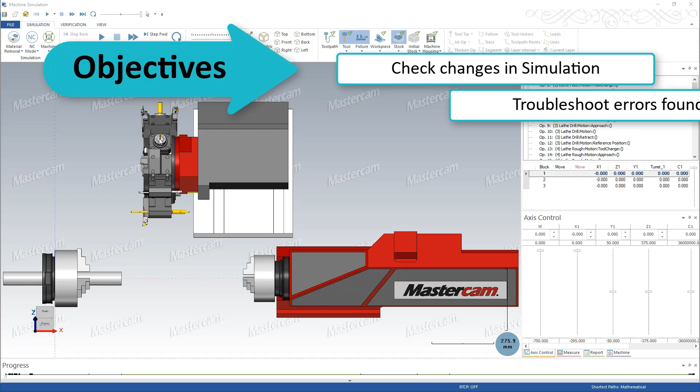In this video, we'll check the previous changes we made in simulation, and we'll troubleshoot any errors that we find. I've launched into simulation and I'm ready to simulate our latest changes. I'll be speeding up the video when appropriate to move through areas in simulation that have no collisions.

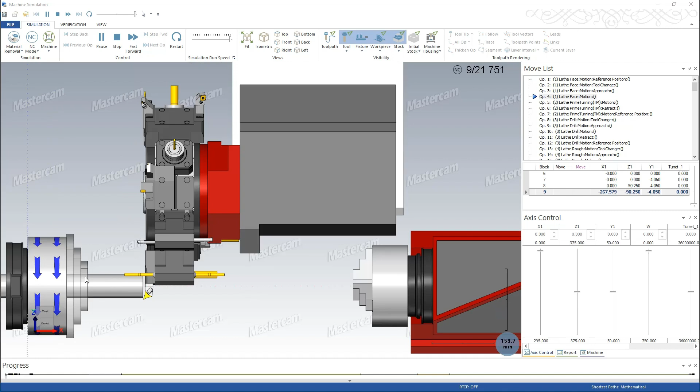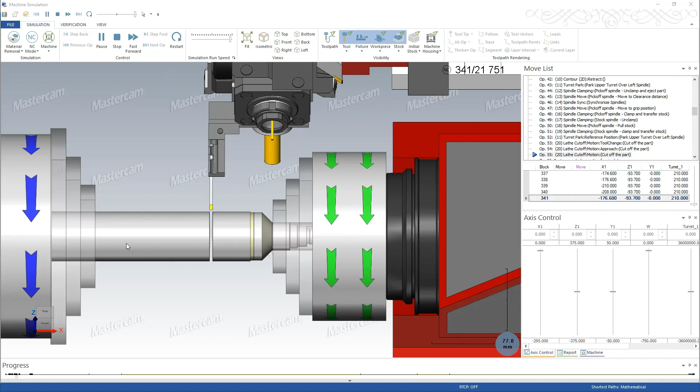I'll start the run button and zoom in on the left spindle. Our left spindle ops and our pick-off cutoff look good.

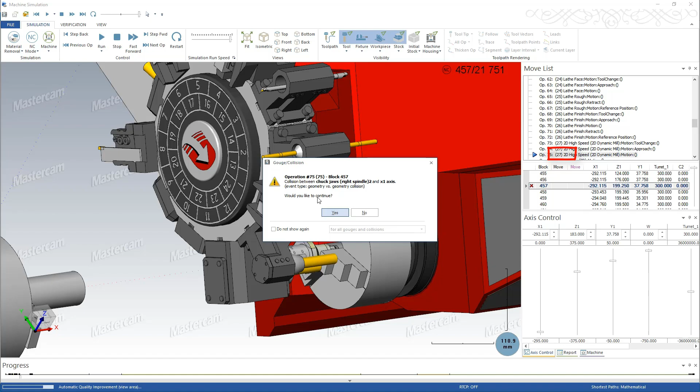We have our first collision on the right spindle. We can see that it's operation number 75 on the move list, which would be operation 27 in the toolpath manager. I'm going to say no, I don't want to continue. I want to take a look at this. This is our face mill, which is doing the scallops, and we're hitting the chuck jaws.

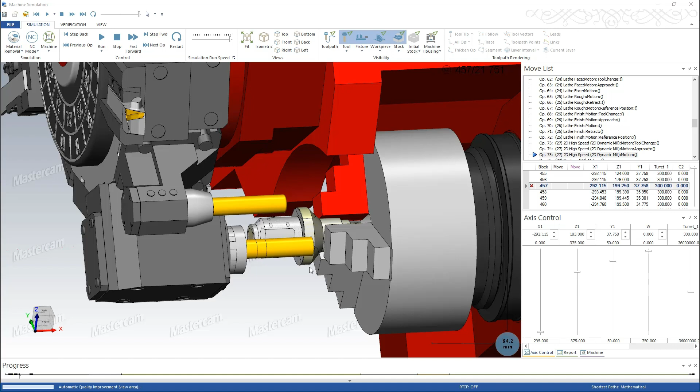This is a Y-axis toolpath, and we are opposite the center line at this point. I'm going to keep running, and I'll have to check through these collision alarms.

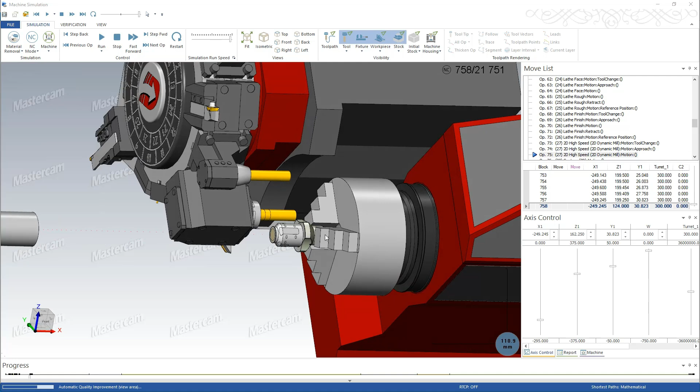You'll notice that this last scallop right here didn't have any collision. It's on the turret side of the center line. So I'll keep running.

We're going to run the finish op on the same feature, so we're going to have the same issue. Again, we're using Y-axis at this point.

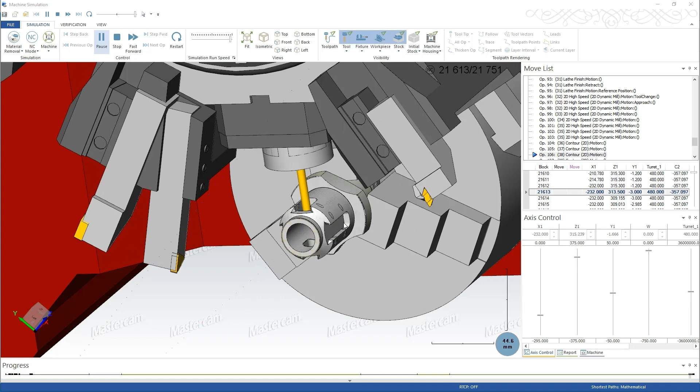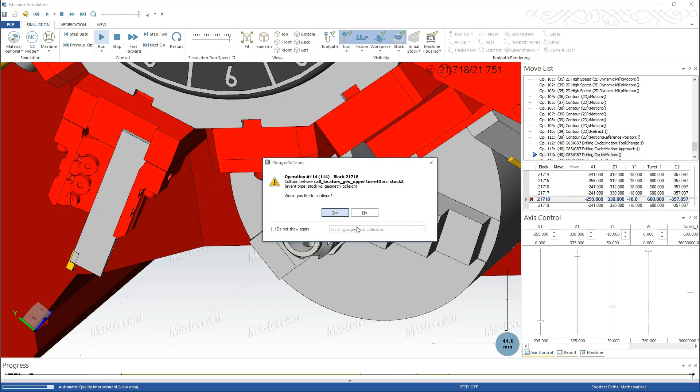Looks like we have another collision here. Operation 114 on the move list, operation 40 in the process list in the toolpath manager. I'm going to say no and take a little closer look at this. We can see that the collet nut is hitting the part.

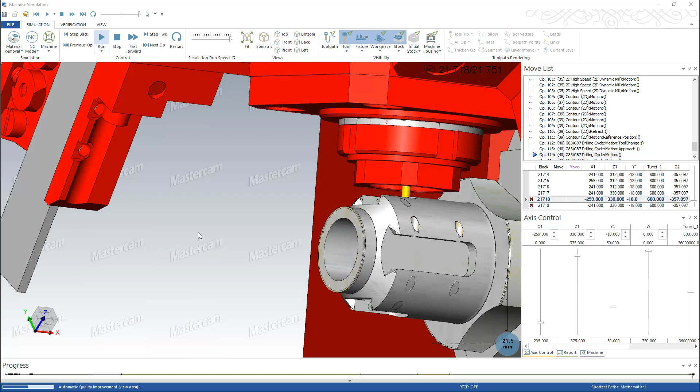I'm going to allow this just to step down. So we're at full depth here, and you can see where the collet is hitting the part. The collet nut is hitting the part.

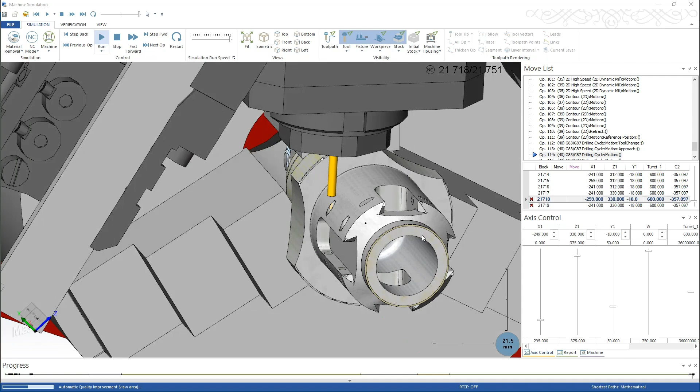Just for measurement purposes, I'm going to come in here and change this minus 259 to minus 249. You can see that a 10 millimeter change will give the clearance that it needs. So for this instance, if we move the tool out 10 millimeters, we'll have the clearance that we need. I'll continue from here.

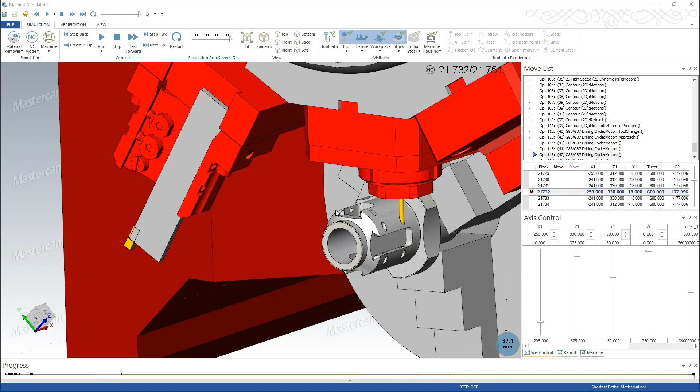I'm just going to step through this. I'm going to stop here again because we're hitting in a different place now. I'm going to go just a little bit further. We're on the outside hole. I want to come into the inside hole here.

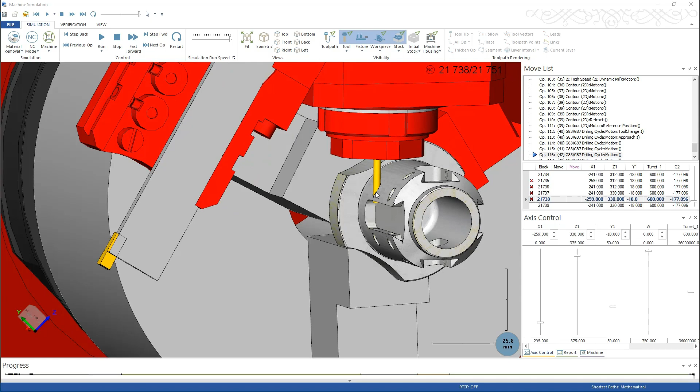If we look at where we're hitting, you can see that we're in a red condition here, so it's a little bit harder to see, but the tool in position 10, because it's a right hand holder, is hitting the chuck jaws.

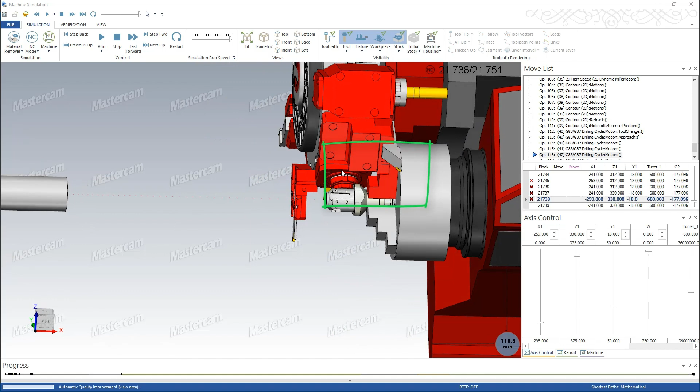So we could either move our locators around and put a left hand holder in position 10, which would probably give us our clearance, or we can move this out. I'm going to go ahead and see how far I need to move this before I clear.

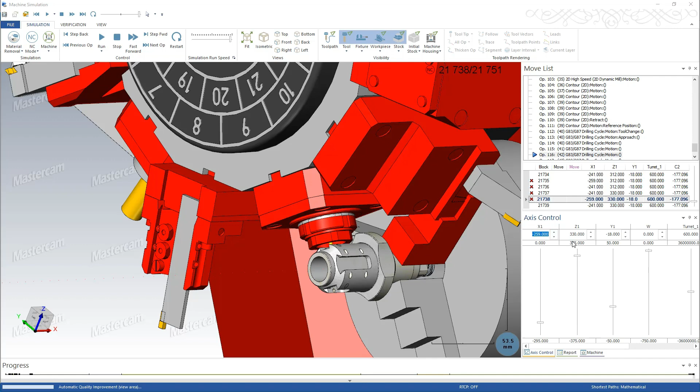So let's try minus 209. That's 50 millimeters from where we were bottomed out, which is a reasonable amount. I'm going to try minus 198, which is 60 millimeters from where we started. It's a little bit better.

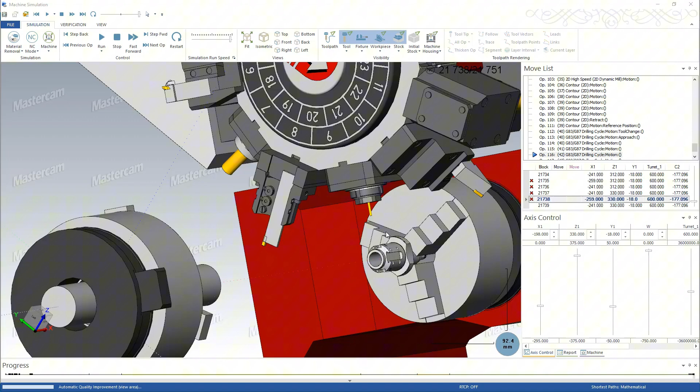So depending upon your machine, your setup, where the chuck jaws are actually stopped, and what you have loaded on the turret, that would determine the best course of action. I'm going to move this 3mm end mill out 60 millimeters, and that should give us the clearance that we need. I'll continue running simulation to see if we have any more issues.